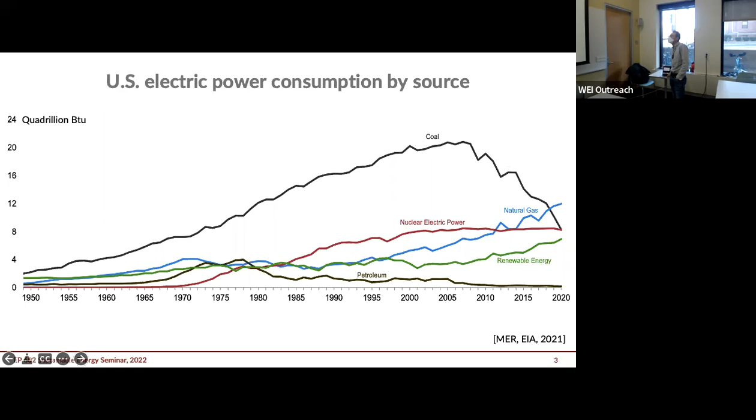And the news out of Wyoming was never great. Looking at these news articles coming out of Wyoming, coal mines being closed down, people losing jobs, but still politicians were claiming we're gonna stick to coal.

We're gonna try to find a way to solve this emission issue and make coal viable again. I just feel bad. Every time I think about that trip, I feel really, really bad. I actually do not know how these politicians and energy experts can sleep at night when they claim all these things.

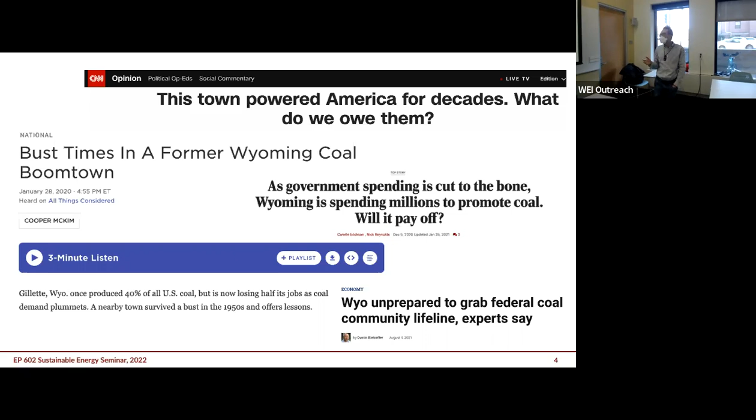But the point I want to bring out here is that we are looking at some dramatic changes in the next several decades. And most of these changes will be driven by climate change. We know that in order for us to solve our climate change issues, we have to reduce our carbon emissions, and we need to do that pretty fast.

So at this point, we're emitting about 35 billion tons of CO2 every year. This number goes up and down depending on how you do the calculation. And if we get our shit together and start reducing emissions right away, in order to mitigate climate change impact and limit the impact to a reasonable level, we have to essentially cut our emissions to zero by 2050.

And that will drive a lot of dramatic fundamental changes to a lot of communities, a lot of people. They will affect every one of us. So it will be worth taking a look at where the change is going to happen.

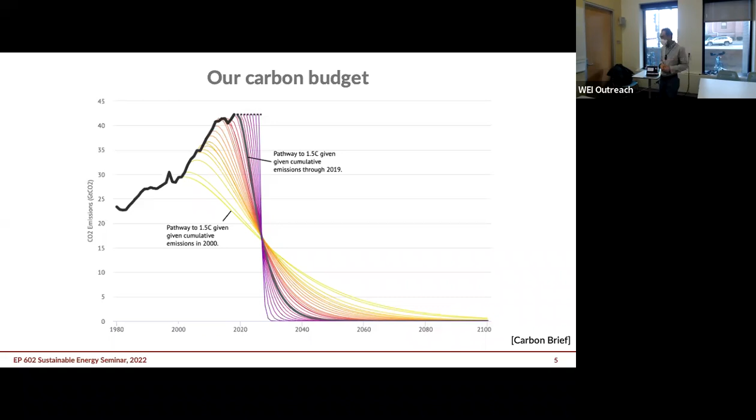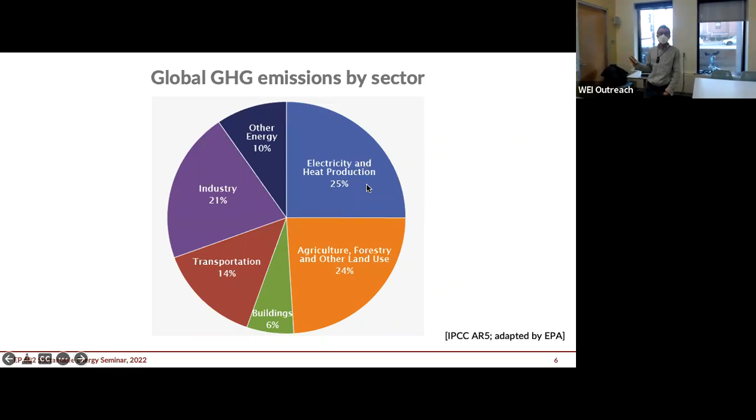In some sectors, changes are already happening. If we look at where our CO2 emissions are from at this point, we know that about a quarter of the emission is from electricity production from power plants, this part. And we know this part, we are seeing changes already. The changes are actually being driven by economics.

At this point, you might already know this: solar and wind electricity is already one of the cheapest ways to generate energy. It's cheaper than nuclear, cheaper than coal. That's why coal is not doing very well at this point.

I'm not an expert in renewable energies, but there's just one point I want to make here, which I don't hear people talk about very often. Some people will say right now solar and wind are cheaper because the penetration is limited. If we continue to increase the percentage of energy production from solar and wind, we need to add storage to account for energy storage, because sun doesn't shine all the time and wind doesn't blow all the time. So that will drive up the cost.

That is true, but something people don't often talk about is that as you add more wind and solar, the cost for traditional energy production will also go up. So on this graph, maybe the solar and wind cost is underestimated, but the traditional fossil fuel costs for energy production are also underestimated. Because if we have abundant solar and wind electricity, it just doesn't make economic sense to continue to burn coal and natural gas to generate power.

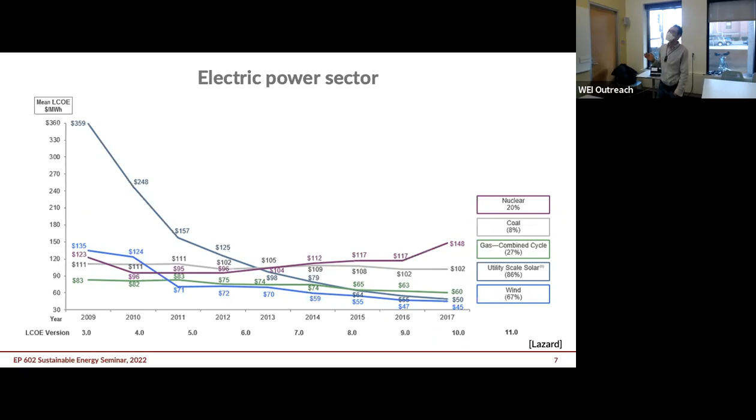So we will have to see how this continues to work, but in the near term it's pretty clear our energy transition to renewables is happening pretty fast. You can see the trend in the global power production chart. The renewable energy in the past decades really is picking up. It's not happening fast enough, but there's no way it's slowing down in the near term. So definitely our electricity power generation sector is getting cleaner.

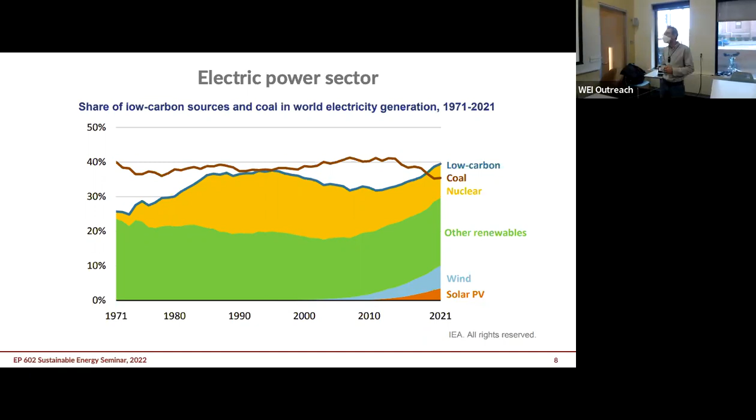So that quarter of the pie is getting cleaner. We also know that we generate a lot of CO2 emission from cars and trucks, all the transportation stuff, which is shown here. That's a big part of the pie also.

In this sector, transportation, about half is from passenger cars. Then we have trucks, airplanes and ships. So we are also seeing changes in this sector as well.

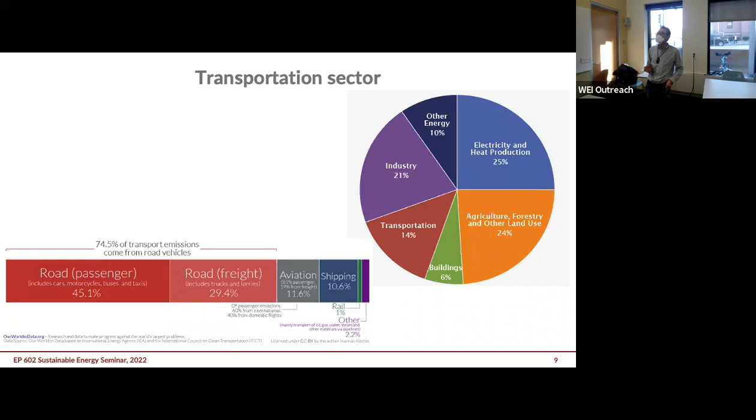For the passenger car sector, I'm fully confident we will see increasing rate of adoption of electric vehicles, which will drive down the CO2 emission from that. I know this because I personally have been driving an EV for 6-7 years already. So even if I don't care about climate change, I wouldn't even want to go back to a gas car. I hate it. I do not miss going to a gas station. If you ask me what the gas price is, I don't know and I don't care. And if you talk to a lot of people driving EVs, that's what they will tell you also.

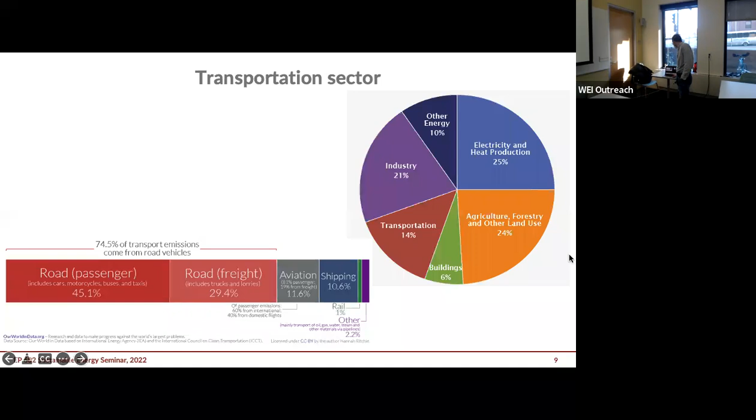So I'm fully confident we can really replace a big part of this sector with EVs. And as we add more renewable energy onto the grid, transportation will get cleaner. Trucks, I'm also very optimistic - a big portion of this sector will also get cleaner. There are some sectors like airplanes and ships where it will be challenging, but it's a relatively smaller percentage in transportation. You can see the trend - we are on the early stage of acceleration of EV adoption globally. So I feel very confident about that part.

Now, what's left then? If electricity power is getting cleaner, transportation is getting cleaner, what's left? We have the building energy consumption - these are the building operations, electricity used by the buildings. As the electricity and heat production gets cleaner, that part will also get cleaner. I will skip the agriculture section because I have no expertise in that field.

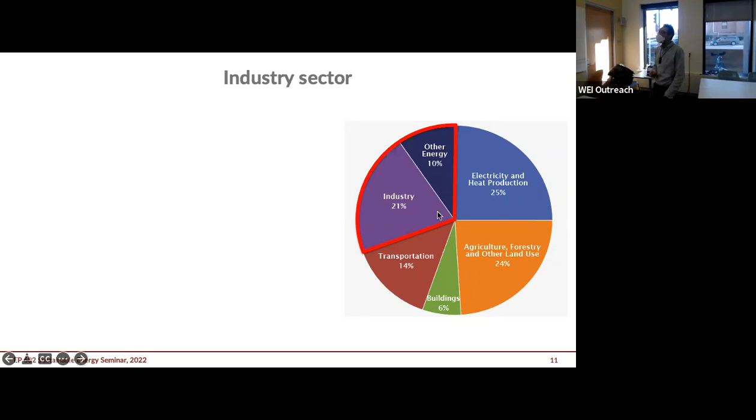So what about this big chunk over here? This is more than a quarter of our total CO2 emission. What is it? That's the emission we generate to manufacture goods, materials for our day-to-day use. So what are the stuff we are manufacturing that generates so much CO2 emission? I guess I would just pause a second and ask, what do you think is the largest,

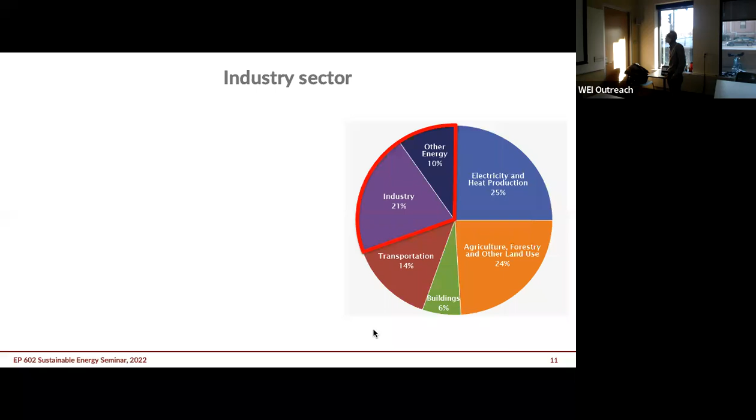the most produced material in the world? What is the most produced material in the world? Concrete. Yes, concrete, that's a good answer. It is concrete - every year we produce 30 billion tons of concrete. And the next one is cement.

I'm not counting water now - water probably will be comparable to concrete, but that's a different story. So cement is the next most produced material, at 4 billion tons every year. And the next is steel - we produce it at 1.6 billion tons a year.

Anything else is two orders of magnitude lower than concrete. For example, plastics, 0.3 billion tons - that's 1% of the concrete production. And because we're producing so much materials like concrete and steel, they generate a lot of CO2 emission. Where do we use concrete and steel? It's for construction, buildings, roads, right?

So I will talk about where the concrete emission is from - it's really from the production of cement. Cement is used to make concrete. I'll give you some more information - construction material 101 later. But production of cement itself generates about 7% of our total CO2 emission. This number goes up and down depending on how much cement we're producing that year, but on average it has been about 7%. Steel is another about 7 to 8% of global CO2 emission.

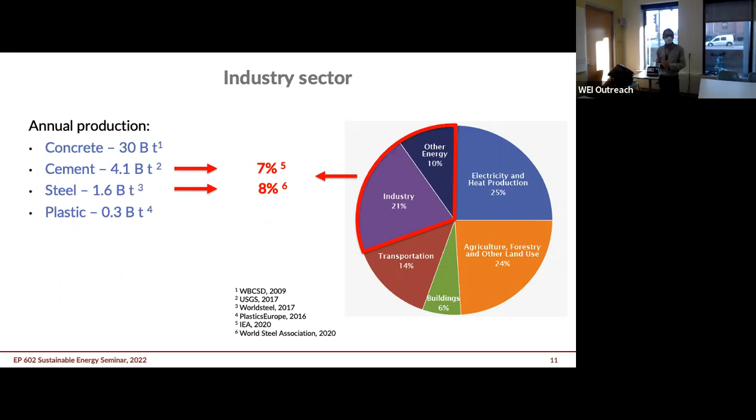So you might think 7 to 8%, that doesn't sound like a lot, but let's put this into context. Passenger cars generate about 10% of our CO2 emission, and all the trucks on the road in the entire world generate about 6% of CO2 emission. So the production of cement itself generates more CO2 than all trucks on the road.

Of course, there will be a disclaimer here. In the US, we do not produce that much cement - cement production only accounts for 1% of our total CO2 emission. But globally, cement is a big contributor to the CO2 emission.

Another side note I want to point out here is about the scale of the material production. You notice that other than concrete, cement, and steel, everything else we're producing at less than 1 billion tons a year. If you remember, I mentioned that the global CO2 emission at this point is about 35 billion tons.

People have thought about converting CO2 into something useful. But if you look at the numbers, if you convert all the plastics in this world, every type of plastic, and you produce them only using CO2 captured from the air or from power plants, you're not going to make a dent in global CO2 emissions. Even assuming you don't generate additional CO2 during that process, you're only reducing global CO2 emissions by 1 or 2%. That's it.

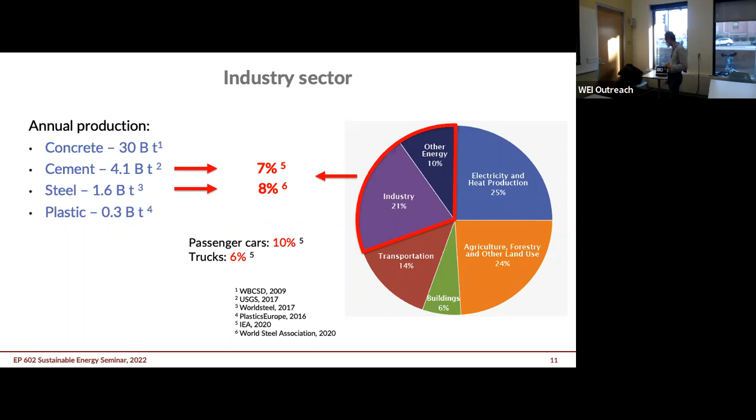Before we go into details, I want to do a little construction material 101. What is concrete and cement? We're going to skip steel, because in terms of CO2 emissions, steel production is in a slightly better position than concrete and cement production. For those without a civil engineering background, cement and concrete are different materials.

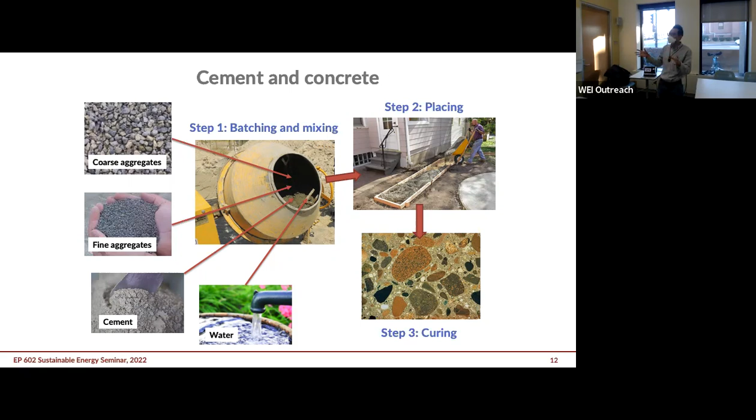Concrete is the material we use to build buildings and roads. It's a mixture of crushed rocks, what we call aggregates, crushed into different sizes, coarse and fine. Concrete is a mixture of these crushed rocks, cement, water, and some minor other things. You mix them together, it hardens over time, and you have your building or road. Essentially, you can think of concrete as man-made rock: we take a natural rock, crush it into aggregates, then glue them back together into the shape we want, into buildings or roads. That's what concrete is. Cement is the glue — mixed with water, it produces a glue that holds all these blocks together.

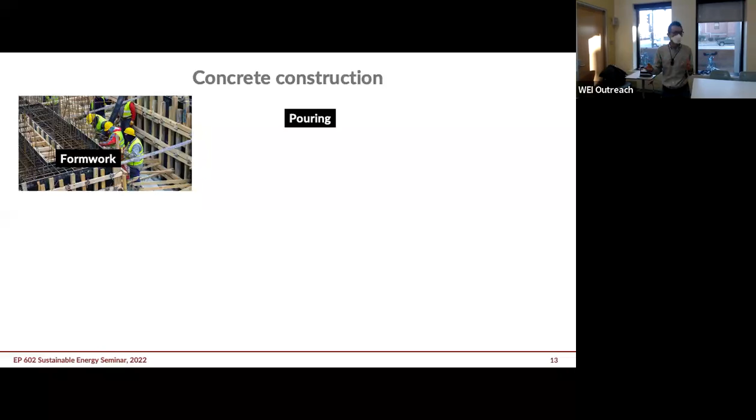The reason we use so much concrete is really the ease of construction. To make a concrete building, you set out formwork first, just molds for construction. Once the formwork is set, you can either pour concrete into it, or, very commonly nowadays for building construction, pump it in. When you mix all the ingredients together, it behaves like a liquid — you can pump it several floors high into these formworks. Then you just wait a day or so, take the formwork off, and you have your building or concrete structure.

The key benefit of concrete as a construction material isn't about its strength or mechanical performance, it's not because it's hard or anything else — it's because you can form it on the job site. You can take a liquid material, pour it into a mold, shape it into whatever you want, wait, and it hardens into that shape. You cannot do that with any other construction material, not at the scale we need for buildings and roads. You cannot shape steel very easily on site, nor wood into any shape you want. Only concrete allows that, which makes it really indispensable in a lot of construction applications.

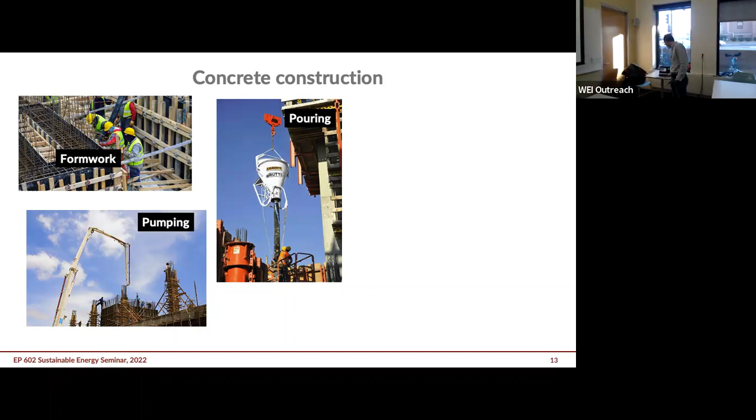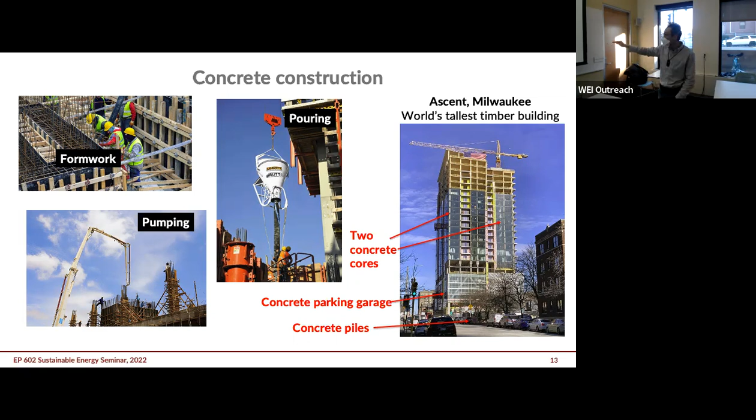You might have heard people looking into low carbon footprint construction materials. One of the most talked about is wood — you can now build tall buildings with timber. The world's tallest timber building is being built in Milwaukee; if you go downtown you can see it, one of the tallest timber buildings in the world, which sounds pretty cool. But if you look into it, you'll find this building was built on concrete piles — steel tube filled concrete piles — and the first couple of floors are a concrete parking garage. The building sits on that concrete parking garage. The sections you see are not made of wood, they're pure concrete.

Within this building, within the timber framework, there are two concrete cores. This is typically how we build high-rise buildings — you build concrete cores which give the building rigidity, so when wind blows on it, it doesn't topple over. The reason you do that with concrete and not wood or steel is because when you pour concrete into formwork, it forms a continuous piece, with no connection as you add more. It becomes a continual, rigid core in the middle of the building that holds the structure rigidly onto the ground.

Then you can build your wood frame or steel frame around it. So you see, even this timber building, we still need concrete. Actually here, the timber is not replacing concrete at all. This is exactly how you would build a steel frame structure with concrete. You'll use the same way to use concrete in the steel frame structure like we are doing here. So the timber here is not replacing concrete at all.

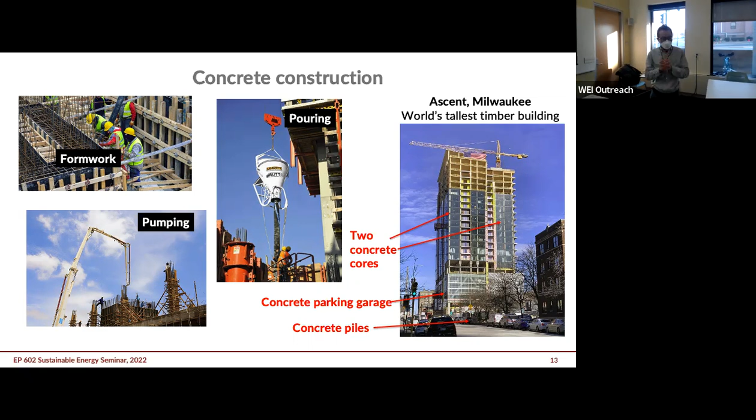It's replacing steel. There are applications when you deal with construction, you just cannot get away from concrete. Parking structures, right? When you drive cars a lot, you have to use concrete. You're not going to use wood to build roads, right? We don't use wood to build roads. Essentially, doesn't matter how you innovate using new materials, it will be really difficult to get away from concrete.

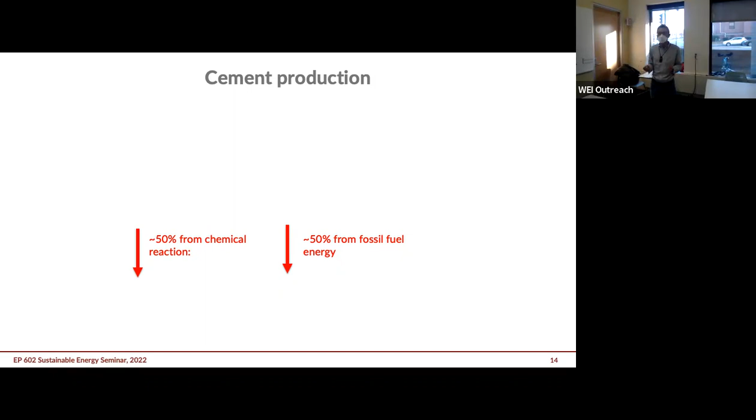So why does concrete production cause so much CO2 emission? Concrete production itself doesn't really generate a lot of CO2 emission because you just mix a bunch of stuff - mix rocks, mix cement and water together, that's how concrete is produced. But cement production generates a lot of CO2 emission. This is because cement production happens at very high temperature. Cement is produced by calcining limestone with some other minerals at very high temperature.

So during this production, you generate CO2 from two processes. One is from a chemical reaction. When you burn limestone at high temperature, you drive off CO2 from it. Limestone is made of calcium carbonate. You heat it up at high temperature, it decomposes into lime and CO2. This generates about half of the CO2 emitted from cement production.

Then the other half is from burning fossil fuel to get to that high temperature. So overall, when you produce 1 ton of cement, you're generating around 0.6 to 0.8 tons of CO2. It used to be almost 1-to-1, but we're increasing our energy efficiency. We're driving down that a little bit over the past decades. Right now it's somewhere between 0.6 to 0.8, which is already a big improvement. But to further drive this emission down to zero is going to be super difficult.

You can take a look at these two components right here. The chemical reaction, we need this in order to produce cement. Cement is calcium silicate. In order to get that calcium into silicate, you need to drive the CO2 off limestone. Otherwise, you're not going to be able to produce cement while using them. So as long as you're producing the same cement as we're using now, you have to induce that chemical reaction. Otherwise, you won't be able to generate the lime. So it's very difficult to get away from this chemical reaction CO2 emission, unless we use a new type of

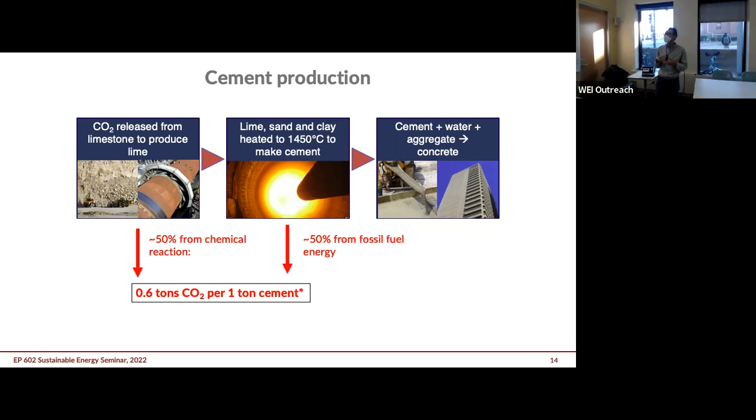you recycle steel - a lot of our construction steel particularly is made from recycled steel - when you reproduce steel from old scrap materials, you could actually use electricity to generate the heat. Cement, on the other hand, doesn't conduct electricity, so generating heat from electricity is not easy. So essentially, at this point, we don't really have a lot of options to reduce this emission.

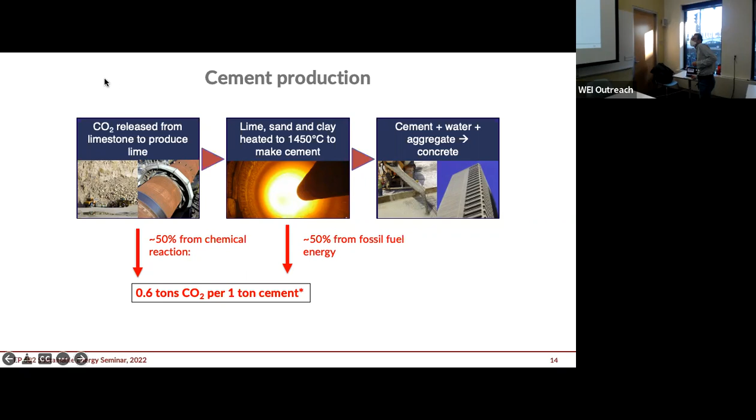So what is the option for cement producers? In some parts of the world, CO2 emission is already being taxed. In California, California has two carbon markets. One is for fuel, mostly for gasoline and other fossil fuels, and the other market is for general carbon markets.

Then Europe also has a carbon market. They give each company a cap - they tell you you can only emit this much CO2. If you go over that limit, you'll have to go onto this carbon market to buy carbon credits so you can emit more. China also just started a national emission trading system

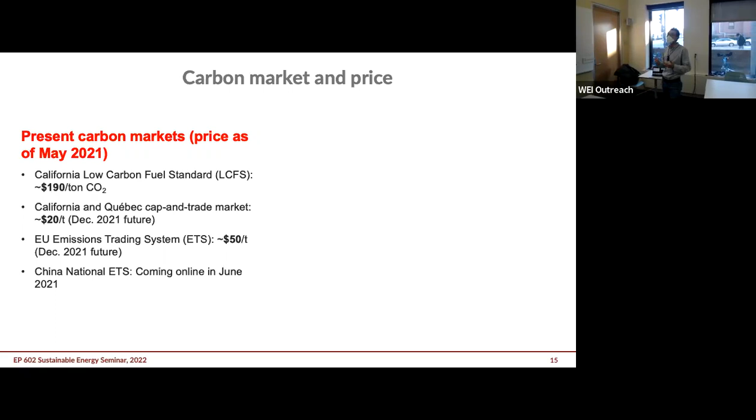earlier last year. So if you look at the average price - by the way, you can actually buy investment vehicles that allow you to track the carbon market price now. Overall, the carbon price has been trending towards somewhere around $30 a ton. And this price is expected to go up as emission policies get tighter. So as a cement producer, you know that if you produce 1 ton of cement, you're going to need to emit 0.6 to 0.8 tons of CO2.

If you cannot deal with that, you can pay the tax in terms of carbon credit. That means every ton of cement, you need to pay about $30 a ton on top of that. And at this point, a ton of cement sells for about $120 a ton. That means the carbon price added to that, you can call it carbon tax, you can call it carbon credit, but you will be essentially adding 25% of your cost.

You can either pass that on to customers, or you can eat that cost. Eating that cost really isn't an option. And what if this price continues to go up as people expect? It's just going to become infeasible for a cement producer to continue to emit this much CO2.

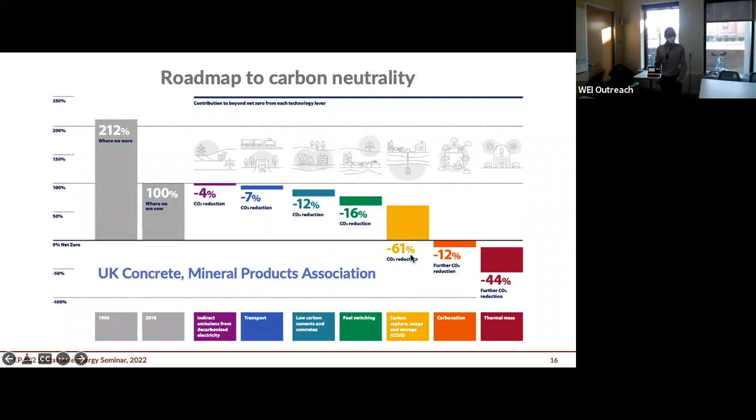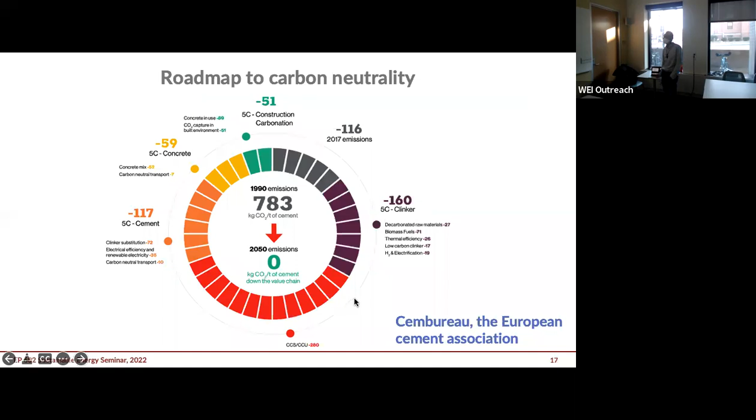Same thing for the European Cement Association's roadmap. You see again, in their roadmap to carbon neutrality, they're counting on carbon capture and storage. There's a lot of innovation they want to claim, but they won't be able to get the cement production down to carbon neutral, so we are still counting on carbon capture and storage.

And what is carbon capture storage? This is not new technology, we've had this technology for a long time. Initially, it was developed for power plants. Essentially, you have a process that separates CO2 from your power plant or cement manufacturing plant flue gas. You separate the CO2, you concentrate it, you compress it into liquid, you send it through a pipeline into some depleted oil and gas reservoir or some other geological formations. You inject it into the ground, then you seal them off. So that's it.

And the cost - can we do that? Of course we can do that. We've had this technology for a long time, this is not new technology. Technologically we can do that, but there's a cost associated.

So the International Energy Agency estimates the cost for post-combustion capture - this is what we mean by capturing CO2 from cement or power production - is somewhere between $40 to $120 a ton. Based on my anecdotal evidence, the cost is much closer to 120, or even higher than 120, for industrial operations. The $40 a ton figure is really not realistic at all.

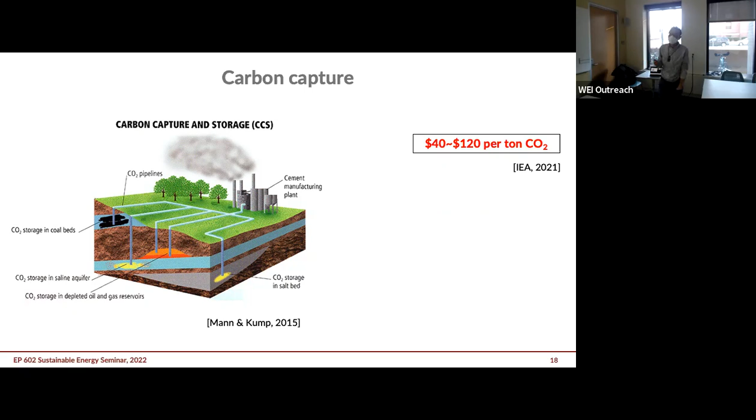So people always ask, can you do this? Can you capture CO2? Always the answer is yes, you can capture it, but it just doesn't make sense at this point for cement manufacturer to do it because it will basically double the cost of your cement production. That means everyone who uses cement to make concrete, we're looking at double their material costs.

And of course, a lot of other companies are jumping on this bandwagon of capturing CO2. All these old oil gas companies, they have a lot of depleted oil gas reservoirs. They want to use this opportunity to make more money, and they are trying to make money basically off cement manufacturers and the coal power plant owners. So they actually do have a strong incentive to do this carbon capture, but the burden will be put on cement manufacturers to eat the cost, or the users who will build the building, build the road, will have to eat the cost, and the cost is really substantial.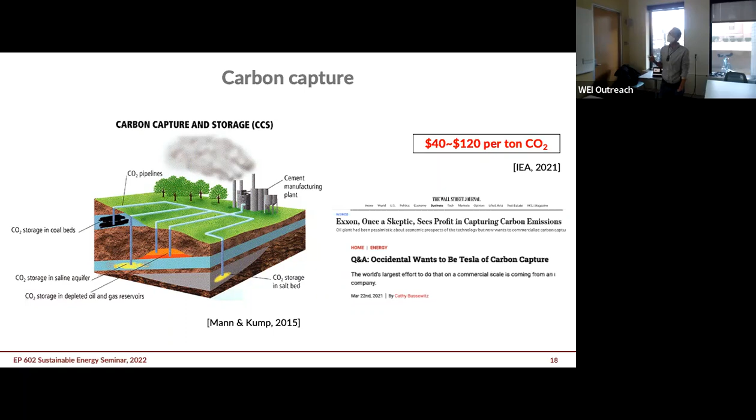So then again, you may ask, if it costs so much to put CO2 in the ground, can we use CO2 to make something out of it? Can we turn CO2 into concrete? If you, like me, pay attention to these news articles about how to turn CO2 into concrete, you might have seen a lot of articles about that - turning CO2 into concrete, turning CO2 into that. There are lots of people doing that out there.

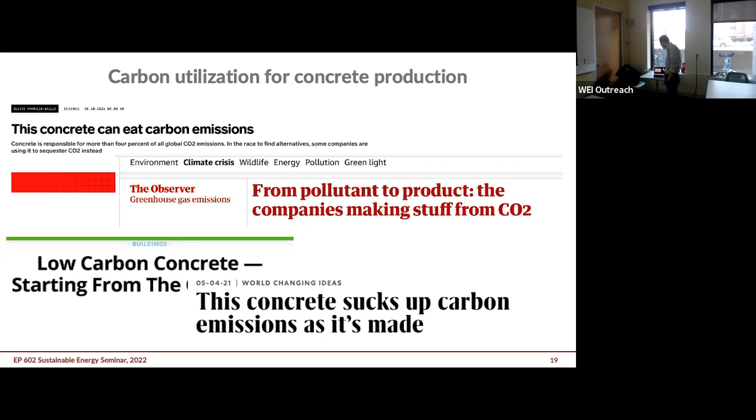Before we get too excited, we actually need to do our homework. If you actually do accurate carbon accounting, you will find a lot of these processes don't make sense at all. If you do a rigorous life cycle assessment, you will realize a lot of this technology which claims to use CO2 to make concrete is actually not reducing CO2 emissions - they are actually contributing to CO2 emissions. And also, while you are contributing to CO2 emission using these new technologies, you're incurring additional costs to the cement manufacturers, to the concrete manufacturer, to the concrete users.

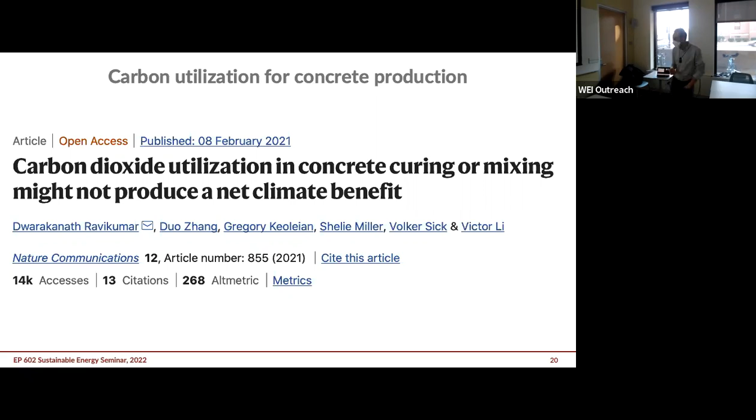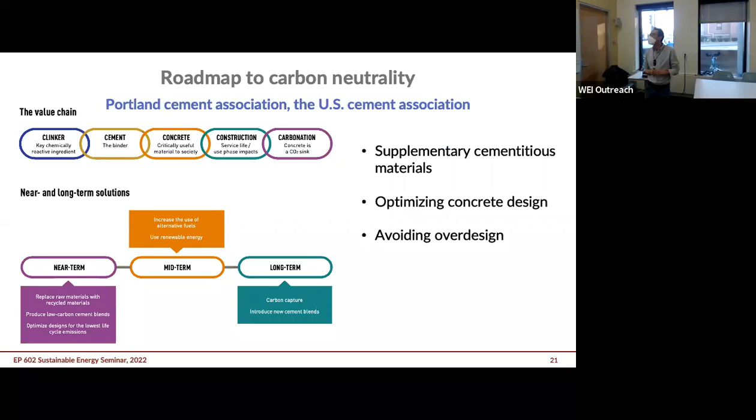They do mention several other options out there we can adopt, which kind of makes sense. For example, you can replace Portland cement in concrete with materials we call supplementary cementitious materials. These are mostly waste materials like coal ash from coal power plants. This ash actually has cementitious properties - you can replace cement with these waste materials, which reduces your cement usage and reduces your carbon footprint.

Then you can optimize your concrete design - you can try to get the same strength, same performance from the concrete with less cement. If you can do that, you can also reduce your CO2 emission. Again, when you design a building, if you don't have to use that much concrete, just don't use that much concrete. That also reduces our overall CO2 emission.

So these are really, really good suggestions, but there are two issues. The first is the amount of CO2 reduction these practices can achieve is somewhat limited, especially in terms of optimizing concrete design and avoiding over-design. Of course, we can do much better in designing concrete than designing buildings, but there are also other considerations.

For example, like I mentioned before, when you build buildings, you are pumping concrete. So if you want concrete to flow like liquid, you have to have enough paste - what I mean by paste is cement plus water. You need to have enough cement, you need to have enough water. You cannot get away with that. Of course, when you pave a road, you can get away with that. You can even have what we call roller compacted concrete, which really densifies crushed rocks.

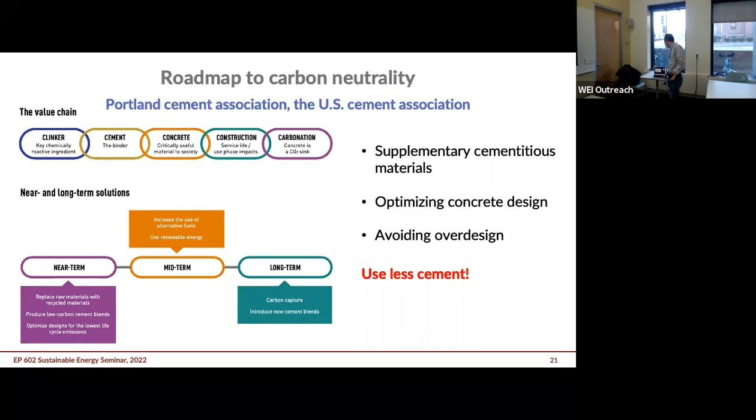So with that said, there are definitely opportunities for technical innovations in this realm. I can tell you this is going to be super difficult. These cement associations are experts in cement chemistry and concrete design. If they cannot see a clear pathway towards carbon neutrality without carbon capture, this has to be really, really difficult.

So overall, there are a couple of ways we can try to drive down the CO2 emission. The first one is, again, improve our cementation efficiency. That's kind of what we talked about before. You can improve your concrete design, you can find ways to make your cement more effective, so you can use less cement to achieve the same performance. That's something we can work on, and a lot of people are working on that too.

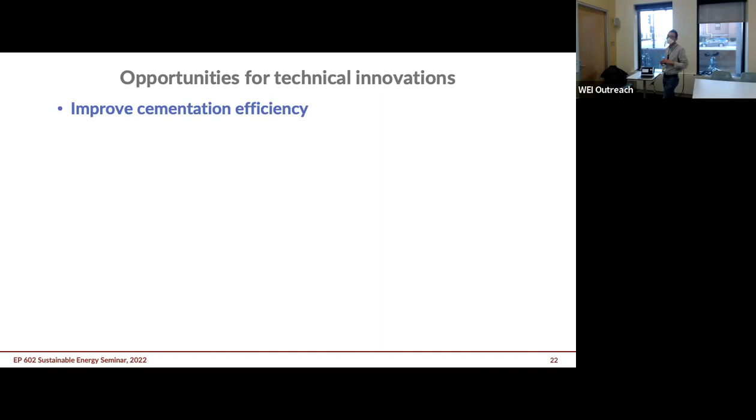The second way is to recycle or upcycle waste materials as supplementary cementitious material. Again, cementitious materials are waste materials that have cementitious properties. But traditionally, we've only been using a small portion of the waste material to replace cement. At this point, we generally replace 20 to 30% of the cement with this supplementary cementitious material, and we only use some particular waste material generated by coal-fired power plants in operation.

But coal-fired power plants are closing down, so we can use this as an opportunity to look for other options as cementitious material. Even though coal power plants are closing down, there are tons and tons of waste material out there in landfills. For example, just look at coal ash. Sure, we're closing down coal-fired power plants, but because we've been burning coal for decades, there are tens of gigatons of coal ash in these old landfill ash ponds. They're just sitting there, sometimes even leaching chemicals or heavy metals into the surrounding communities. So we could actually recycle them, upcycle them as cementitious material to replace cement.

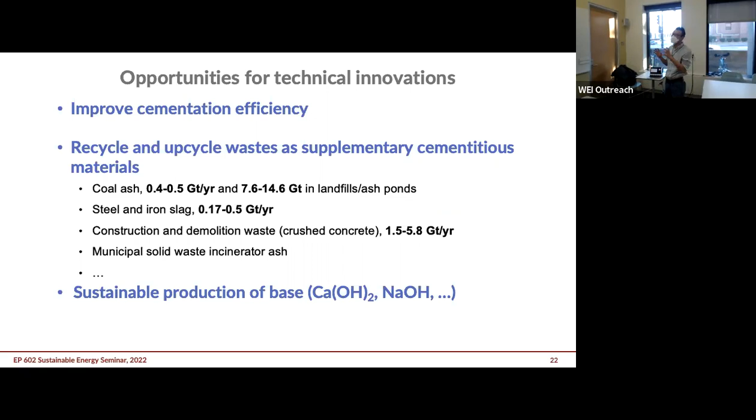So this part needs a lot of scientific breakthrough. We need to find a way to sustainably generate base, otherwise none of the other things will really work. So there are two pathways towards sustainable production of base. One is we can utilize available alkaline material that's in the landfill - some of these wastes are actually alkaline.

So if we find a way to recycle these materials, we can generate lime basically for free. Long-term, we're probably going to need some kind of electrochemical process to produce lime with the help of renewable electricity, allowing us to sustainably generate cementation without creating a lot of CO2 emissions. That's how I see the whole space moving. But there's a lot of innovation happening, a lot of people working on this, so I hope everyone recognizes this is an important issue and keeps an eye out for new developments in the field. That's the end of my presentation.

I see a couple of questions online. I'll read them out so we can all hear. First question from Raj, and I actually had a similar question.

Do you think for at least some locations in the US we could use concentrated solar power for lime production, using renewable energy as a high temperature fuel source? Maybe add geothermal as another opportunity. I'm not an expert in renewable energy, but my understanding is concentrated solar power, even for power generation, isn't economical anymore. CSP is just so much more expensive than solar panels and wind. We're not even building CSP power plants anymore. And if you think about the logistic difficulties of combining a concentrated solar power plant that uses so much land with cement production, where we need to concentrate the heat into a cement kiln, there are just a lot of logistic challenges there. I'm sure it can be done, but it's not going to be cheap either. Same for geothermal - if you're living in Iceland or near a volcano, for sure. But if you live in most of the US, you're not going to be able to get the high-grade heat from geothermal very easily.